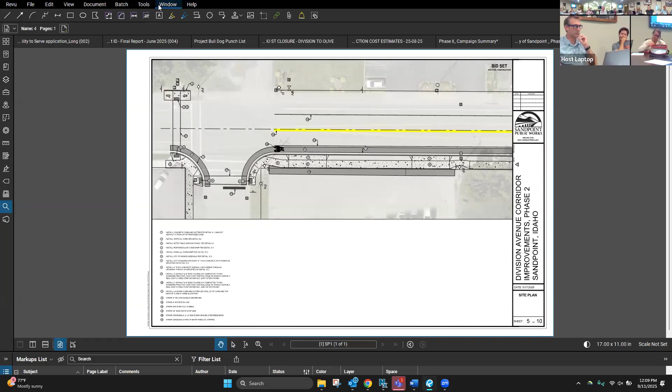Division Avenue Corridor Improvement Project. This is the second phase of a multi-phase project on Division Avenue. This plan is in our multimodal transportation plan, it's in our long-term plan. The purpose of that project is to provide a road diet on Division Avenue and also improve the corridor for multiple users.

So specifically, the whole project looks at Division from Highway 2 all the way to Baldy. This particular phase is just picking up on the east side of the project. On the south end near Highway 2, we did a project last summer, or maybe the summer before, and got 2 blocks of sidewalk installed. It provided a lateral shift, so the traffic lanes on Division Avenue narrowed, and we were able to rebuild the sidewalk there so that it was no longer curbside.

The value in that is to provide a buffer area, a more comfortable place for pedestrians to walk so the sidewalk's not right on the curb. It also provides an opportunity for snow storage and tree plantings.

So we successfully completed 2 blocks. This phase 2 project picks up right where that previous project left off and extends 2 blocks north to Pine Street. So on my screen here, again, we're on Division Avenue.

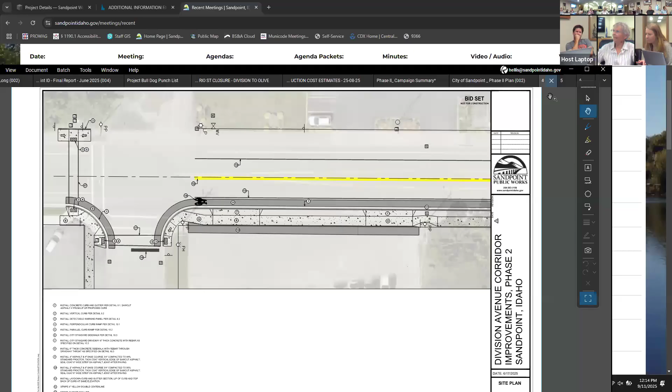And could we go back to that intersection—what's the curb radius there? I don't have the curb radius number for you, but I could figure it out. It looks really wide. It looks like it's matching the existing radius.

Our curb radiuses are all determined by the Urban Area Transportation Plan, the UATP. That's the city standard for curb radiuses, our standing document. So when this road was designed, it was designed in accordance with that plan. We as a city recognize there's a lot of value in narrowing curb radiuses, so we look at what traffic's on the road, what the appropriate design vehicle is, and redesign. In this case, Brandon's not here as the engineer to answer this, but it appears he matched the existing curb radius and did not do an engineering assessment on changing that radius based on the design vehicle and road use.

It was a replacement factor. What's your design pedestrian there—what are you going for safety for? Is it a middle schooler at Superior? All pedestrians are the same in our design, so we actually don't target a type of pedestrian. It's just accessible for all users.

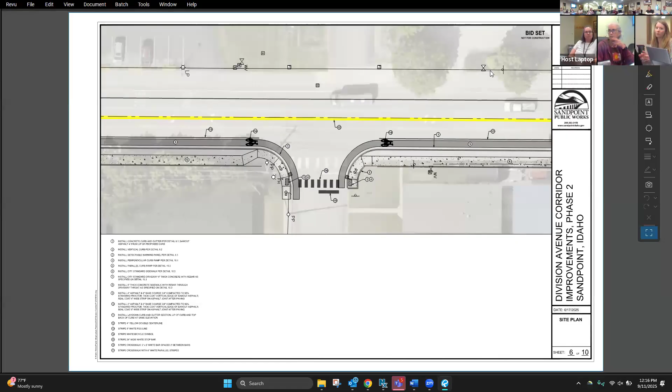That's really heavily used for the kids. This is a child pedestrian safety grant that we got for this project, so we do know a lot of our users are going to be children going to school.

Heading just to the north, we've got our second intersection. This one is very similar, so you can see the sidewalks along the property line. We have snow storage here between the sidewalk and the back of curb. The sidewalk jogs, or diverts, to the curb, and notice that there's a crosswalk.

This portion here, the reason that this is going curbside is because of the property line. So this is private property right here. From a geometric perspective, it had to go north so that we could have a ramp that's all within the public right of way. If we hadn't relocated the sidewalk, it would have had to go on private property. It was a right of way constraint, and it can't go there, due to the ramp.

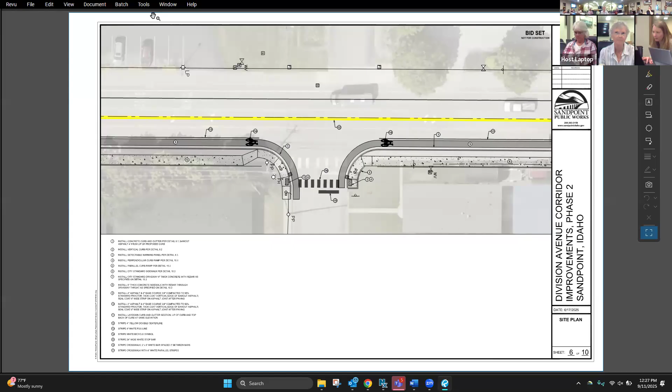Let me scroll if I can, it's just a suggestion. Someone's got to make a suggestion.

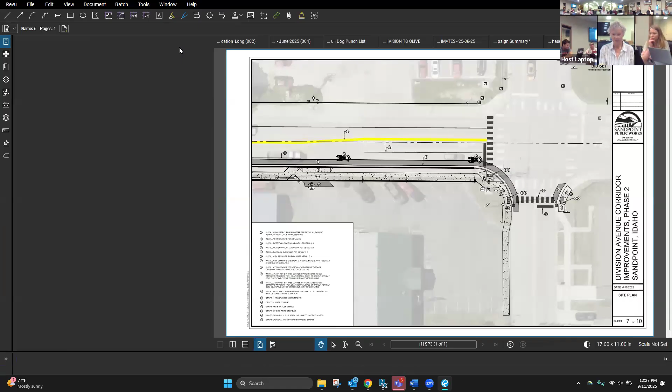The committee supports sidewalks on division being set back from the curb. At intersections, we ask to evaluate all elements, maximize safety of children walking and biking. Managing vehicular turning speeds seems important. And I think you should say something about the crosswalk being closer to the corner - well, I don't know, that's telling them what to do, but that would be part of that evaluation.

Need the second. No, yeah, okay, so I'll second.

The committee supports sidewalks set back from the curb on the east side of division. At intersections, we ask for evaluation of all elements to maximize safety of children walking and biking. Minimizing vehicular turning speeds seems important.

I second that. Is there any more discussion? All in favor? Unanimous, so we don't have to go further.

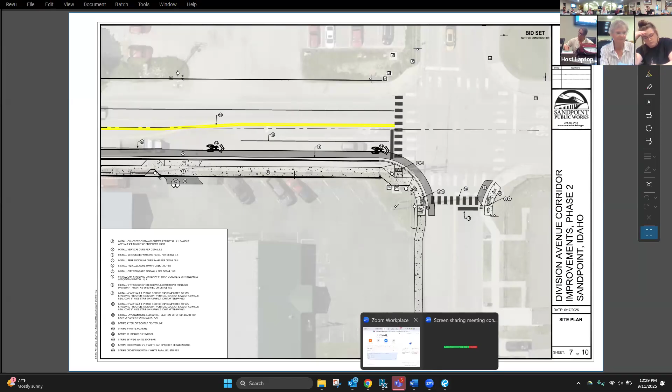Next, city staff is requesting a review of the 4th Avenue sidewalk project, and I'll again yield the floor to Holly.

Give us just one second. We do have your comments from the July meeting, and we've reviewed those. Some of the comments made at that meeting are fortunately already accounted for in this plan set, particularly the connection via Pacific to Third Avenue and ultimately the Third Avenue pier. We're still working out some of the details, but that was a high priority to make that connection. Third Avenue itself only has 5 or 6 houses on it, so it's not heavily trafficked, but we're going to be able to get sidewalk on the west side of Third Avenue all the way down to the pier, which I'm pretty excited about.

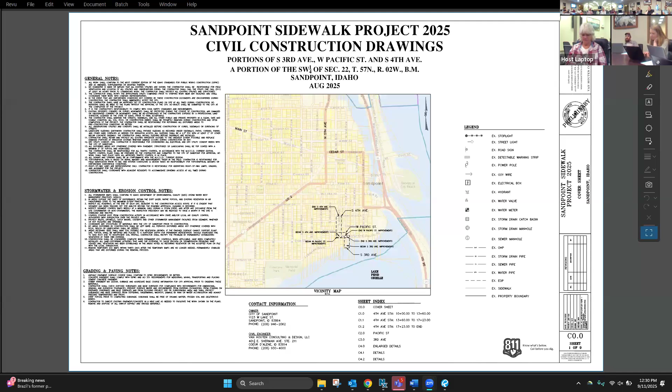We're also going to get sidewalk on the south side of Pacific, making that connection, which is a pretty big win. I was over there a number of times throughout the summer, and it's incredible how many people use that pier at all hours of the day - 7:30, 8 in the morning all the way through sunset. That was a high priority when we started this project.

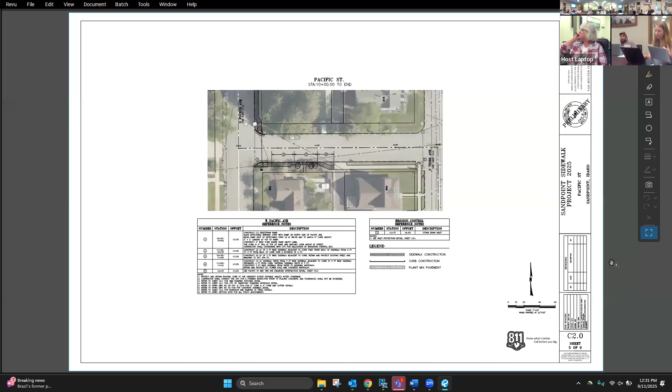Go ahead, Holly. Just a quick introduction - thanks to everyone for letting us amend your agenda to add this. As we discussed earlier, we'd like to bring projects to you earlier, getting your feedback on a concept at 30%, minimizing design changes, and not putting you in a position of acting as an engineer. I think this is a good alignment.

For that, Eric got plans just last week from his engineer, so we thought this was a good time to bring it to the committee in the spirit of doing things early, not wanting to wait a month. Thanks for letting us get on your agenda, and Eric can go ahead and take it from here.

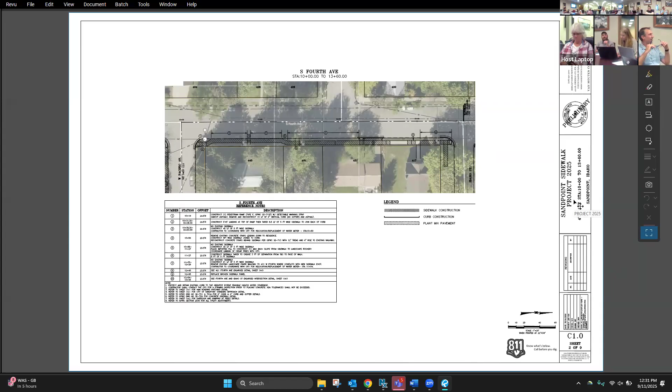There are crossing connections at streets and crossings where we can fit them currently. Where we can fit them is partially determined by the presence, in 2 or 3 cases along Fourth, of power poles being directly across from an intersection or directly across from where we would want a pedestrian ramp. Some of those we may be able to relocate. Sometimes working with Avista, the poles are easy to pick up and move; other times, particularly if there's a transformer on the pole, they're really expensive, so it may not be an option. There are some intersections you'll notice that don't have them, and that's part of the reason.

There is one right in front of us here, where Pacific comes in. There was a connection made on the north side, right where the cursor is. We can fit that in right next to the opposite side of the street's driveway apron. On the south side of the street, there's currently a pole right in the way with a guy wire that comes down on either side, and that's one we're going to ask about. As it stands currently, it's not an appropriate space to put a receiving ramp, but we'll find out - I'm going to meet with Avista and find out.

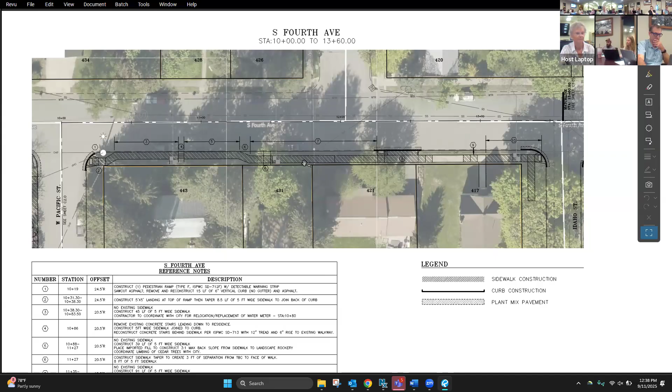So we're here. Yes. So we have sidewalk infill in a couple of locations. And the angular lines that are right where Holly's cursor is now, that's where sidewalk doesn't exist currently. So that's just the indicator on the plan set that that's an infill where we're making a connection that doesn't exist currently. On this set, as you all know, 4th Avenue in this stretch is a bit of an odd block.

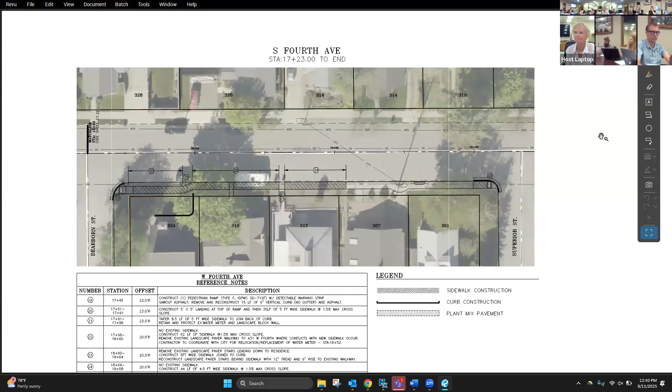So you can go to the next page, Holly. Just generally, Eric, if there's challenges in the design. It's not easy to put new sidewalk into existing infrastructure. It is not. Very challenging to retrofit. Challenge with tough decisions. Yes, absolutely.

This street - so this is Dearborn on the left-hand side of your page and Superior on the right-hand side of your page, moving further north. We are the kind of left half of this block. The south half of this block doesn't have any existing sidewalks, so we're constructing that, and I'm grateful we were able to make this work in this location.

The houses on the bottom of the page there, the east side of Fourth Avenue, have a pretty steep slope that enters much of their houses, and I was a little concerned looking at this that it was not really going to work in that context without creating some slope issues on private property, which we like to avoid where we can. But thankfully, we can make it work. Unfortunately, we have to pass the first residence there - we have to go kind of curbside, but that also matches what's existing further north. So it does kind of just match what is there currently.

As we get to Superior, the opposite side of the street does not currently have a receiving ramp - again, that's one that we're looking at. If I recall correctly, there's a tree directly in that path right now, and I'm the city forester as well as my role as project manager, so I'm keeping those things in mind as we do projects like this. But where Superior connects west is about 60 feet north of there, and we have east-west crossings in both of those locations, so we'll see as we move forward what is possible in that location.